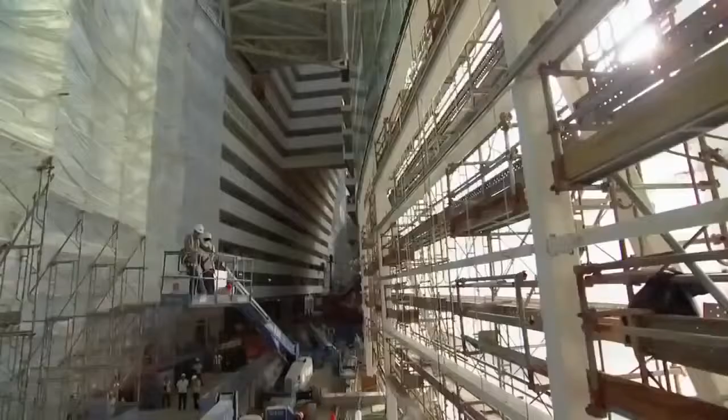Singapore is reinventing itself. This small island nation is attempting to finish one of the most audacious buildings on the planet: the country's first casino, 3 skyscrapers covering 9 million square feet, topped off by an engineering masterpiece, the first ever SkyPark, longer than 3 football fields, with gardens, swimming pools, and restaurants, all higher than the Seattle Space Needle.

We're actually in the pool right now. This is the view from the pool. Wow, it's pretty spectacular. That is amazing.

To finish it, crews must perform some of the highest and heaviest lifts ever attempted. You're putting a piece of steelwork the size of an aircraft carrier on top of 3 towers. They'll tackle one of the largest paint jobs on the planet - you would never do this in America - and erect one of the longest cantilevers in the world, 200 feet out over nothing. Oh my God, that's enormous.

I am in Singapore, a tiny island nation with less than 5 million residents. In fact, the entire country is smaller than all of New York City. Located at the southern tip of the Malay Peninsula in Southeast Asia, the main island of Singapore is both a city and a country, one of the most densely populated in the world.

Culturally speaking, it's a somewhat strict and buttoned-up environment. Chewing gum is against the law. Insensitive behavior is punishable by fine. And if you're caught vandalizing a building, you quite literally get hit with a stick.

But despite this conservative cultural backdrop, Singapore is attempting to reinvent its image by doing something totally surprising. They're going to open a massive casino. With no natural resources of its own, Singapore is risking $5.5 billion in hopes of cashing in on the gambling boom exploding across Asia.

It's a pretty significant gamble, because for Singapore you've never had gaming before at this scale. You've never had a resort at this scale. You're taking a kind of major leap. Yes, it's certainly a transformational project for Singapore, where you hope to not just double but triple the tourism receipts. That's big.

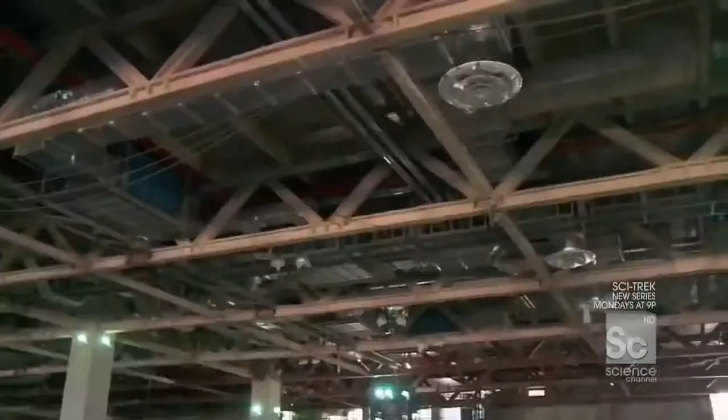The centerpiece of this giant transformation: the Marina Bay Sands, one of the biggest and most expensive casino complexes in the world, unlike any hotel and casino ever built. Rather than just being a traditional hotel and casino like we might find in Vegas, instead we have a museum, theaters, retail, a casino, a massive convention center, 3 incredible hotels, and all of that capped by the first ever SkyPark. The SkyPark on the very top will become the icon of Singapore, we think.

In a move that has never been done before, world-famous architect Moshe Safdie put a park across the top of 3 massive skyscrapers. An 1,100-foot-long urban oasis with tropical gardens and one of the longest swimming pools on Earth, all of it perched 55 stories above the ground.

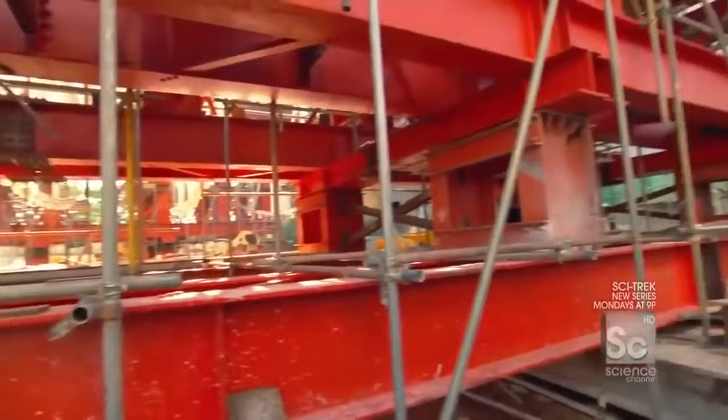So, Brendan, how do you describe a SkyPark to people? It's just a fantastic structure, I've never seen anything like it. There's 3 55-story towers, and you're putting a piece of steelwork the size of an aircraft carrier on top of it, so it's quite a feat. And there's a park up there? There is - well, there's more than that. There's observation decks and swimming pools and restaurants and all sorts of things. It'll be a little city in itself.

The biggest challenge for builders: lifting 7,000 tons of steel, which is more than the main span of the Brooklyn Bridge, on top of 3 650-foot-tall buildings.

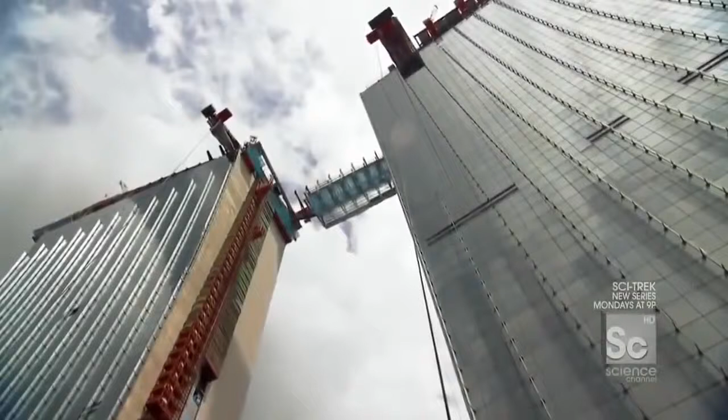To get it up there, the team divided the structure into 14 large but more manageable segments. 6 form the bridges connecting the towers, and the other 8 make up the observation deck, which sticks out 218 feet from the end. Right now, crews are about to lift the second-to-last bridge segment, a massive 350-ton piece that will hang between towers 2 and 3.

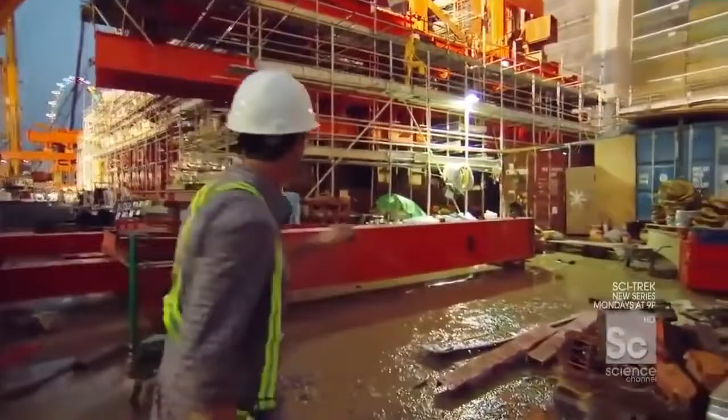It's a little after 7 p.m., and on most job sites it'd be quitting time - folks would be going home. But here in Singapore, we're about to begin one of the most critical lifts in the entire project. That bridge segment right there, an over 350-ton chunk of steel, is about to get lifted up over 650 feet in the air.

I mean, in principle, this sounds crazy, right? Yes, we're actually taking a bridge, lifting it up, and putting it on top of 2 skyscrapers. This has never been done. So you've got to be a little bit nervous to get this thing up. Oh, definitely. We have to get it right.

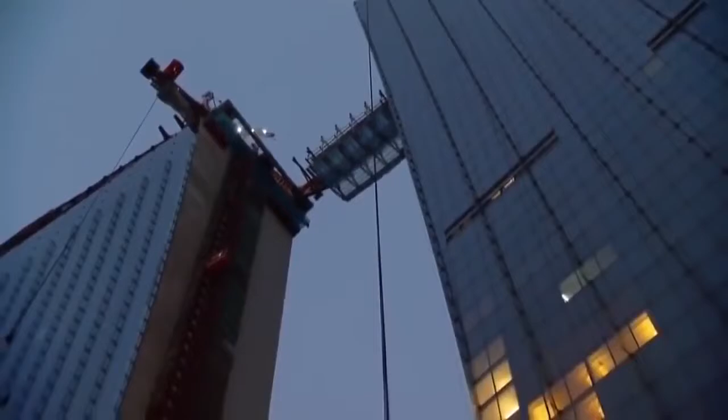Lifting this piece will take some of the strongest hoisting cables ever designed. They get attached to the very top of the segment, 5 stories up. Now I'm on top of the whole bridge segment, and you really get a sense of its length, because look at that. It spans all the way out between 2 full towers, over 150 feet long.

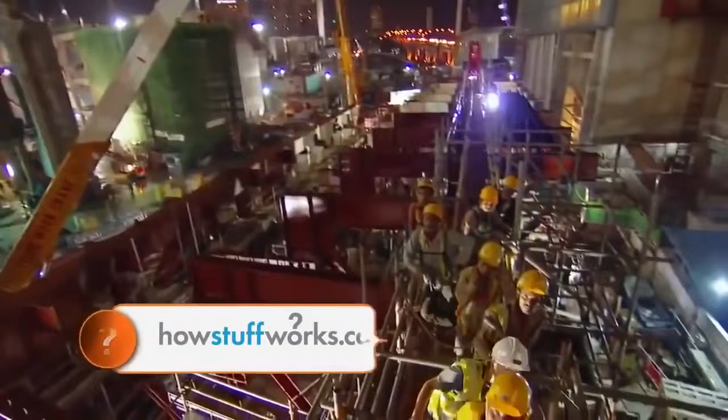And here, this is what it's all about. This is the shackle coming down, over 600 feet up. To really get that point, check this out. Look at the amount of bound cables inside of this thing, just the density. There are 2 of these shackles, one on this side, one on that side. We're going to lift up over 350 tons of steel.

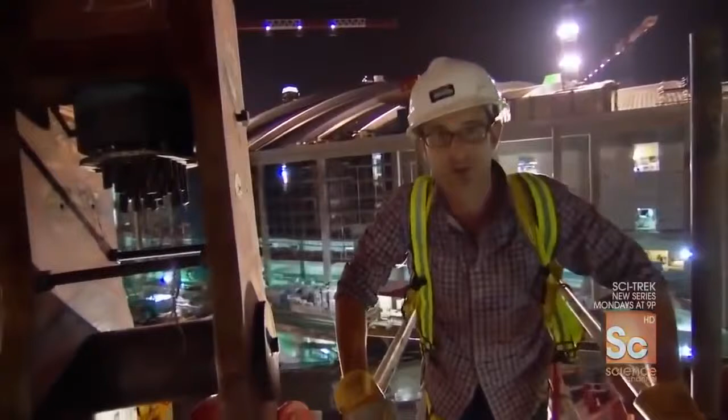All right, you call the man upstairs. An operator from the top of the SkyPark lowers the shackle down. There she comes, there it is, here it is. Okay, 960 millimeters. It has to line up within 1/10 of an inch for this 150-pound anchor pin to fit through. Oh no, stuck. Push, fight, come on, shake it a little bit.

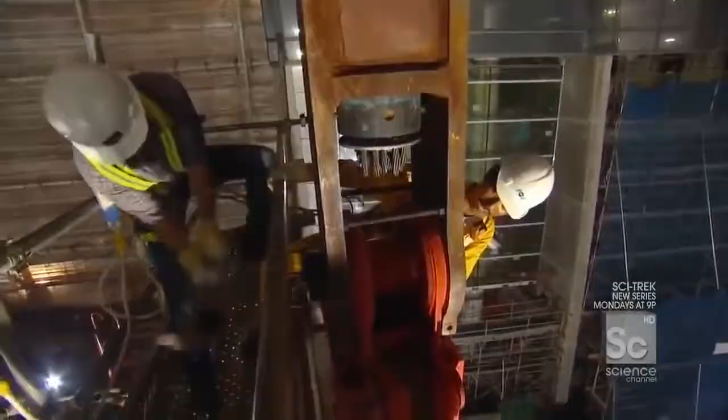Hammer, give it to me. You ready? Here I come. Once the pins are pounded into place and the shackles are connected, there is one final step to make sure that the load is secure. Overnight, crews test the connections for 12 hours by hanging this segment just 4 inches above the support. If everything looks good, it is ready to go up.

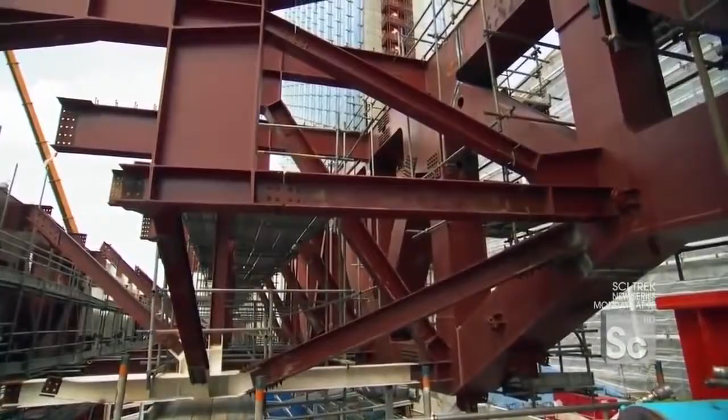Okay, she's floating, good, 4 inches off the ground. Ready for the lift? Yes. How's the wind? If you can see it, it is swinging, and if it swings, it might hit the building. So when the lift begins, the concern is that in a strong wind, like a pendulum, it could move and actually hit the building. It's that close to the building? It is very close to the building.

Because of the curvature of the towers, this piece must pass within 10 feet of 2 glass skyscrapers on its way up. Any wind over 5 miles per hour is enough to call off the lift. So are we good? Are we ready? Yeah, good. So it's now okay to go.

Typically, crews would use tower cranes for heavy lifts, but this segment far exceeds their capacity. Engineers are borrowing the technology from a different kind of construction: bridge building. Even the most powerful tower crane can lift about 20 tons. This thing weighs over 360 - not an option.

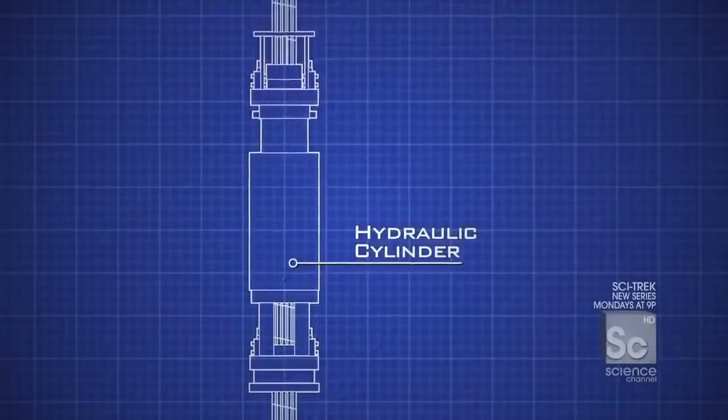So they went with something called a strand jack. To understand how it works, imagine 2 hands or clamps holding a rope. One hand locks the rope, the other brings the rope up, grabs it, goes back for more, brings up more rope, and so on. Strand jacks work on simple hydraulics: a bundle of 22 half-inch diameter cables passes through 2 clamps. The top clamp grips the strands and moves up almost 2 feet. Then the bottom clamp locks the cables in place while the top moves back down for the next pull-up.

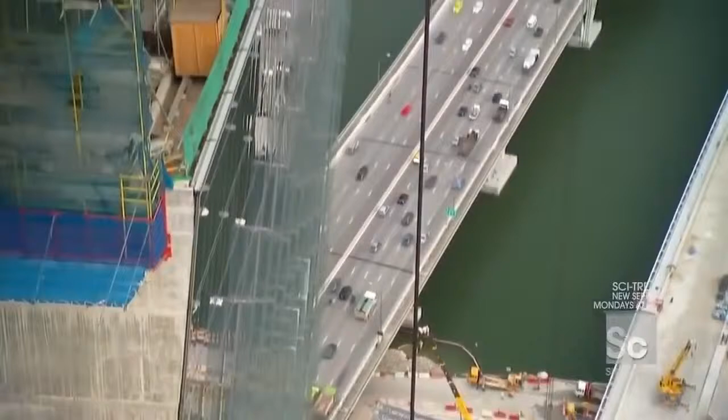It takes 2 enormous strand jacks to lift this segment, one on each tower. Combined, they could lift the Statue of Liberty. It's the first time this technology has been used to make lifts this heavy from the top of a skyscraper.

Good to meet you. Good to meet you. Tony, where am I standing right now?

Well, you're on the SkyPark. So this is kind of where the action is. This is where the pool is. Right where we are now is the second swimming pool. We're actually in the pool right now. This is the view from the pool. Oh my God, people will be able to swim out to the edge of the pool. And literally there'll be no edge, right? It'll be an infinity edge looking out over Singapore. Wow, it's pretty spectacular. That is amazing.

And what's making all of this happen is this really nasty looking beam. That's right - this enormous frame is supporting the strand jacking units. Now, can we actually head up top to the strand jack? Yeah, let's go this way. The strand jack sits on a temporary support structure that extends 30 feet out from the side of the tower. So, Tony, where we're walking right now, we're actually leaving the skyscraper below us and now heading out. We've just walked off the edge of the building.

So we're now standing perched out. There's no more skyscraper below us right now. There's no building below us.

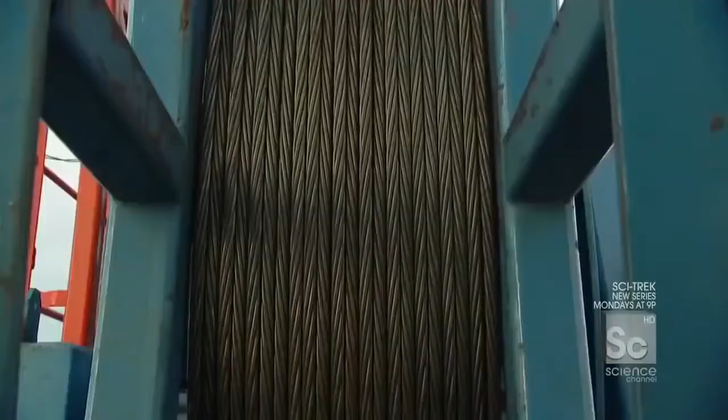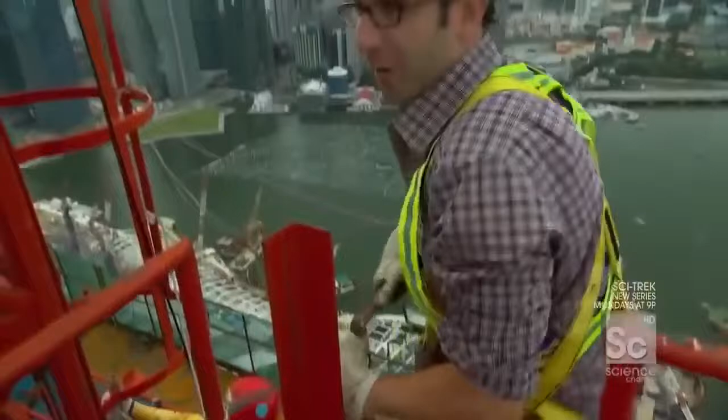It's awkward. It takes almost 30,000 feet of cables to raise the segment, enough to cross the width of Manhattan. And if any of them get tangled, workers cannot lower the piece back down. So one of the most critical jobs on the site falls to the cable manning crew here at the highest point of the SkyPark.

Okay, so I am now standing at the very top of the strand jack. And you know that because right here, this is it. This is the top of the cables. And what we're about to do, every 30 strokes, they stop everything, clamp the lift, and spray some lubricant inside to make sure everything moves real freely.

Unfortunately, I'm getting tasked with that role right now, so what do you got, some WD-40 we're doing this with? Look at this guy. Why is this the most low-tech thing in the world?

Okay, so now what we've done is we've taken the collar off, we've lowered the jack down, now we've exposed the cables to give us good access for some good greasing.

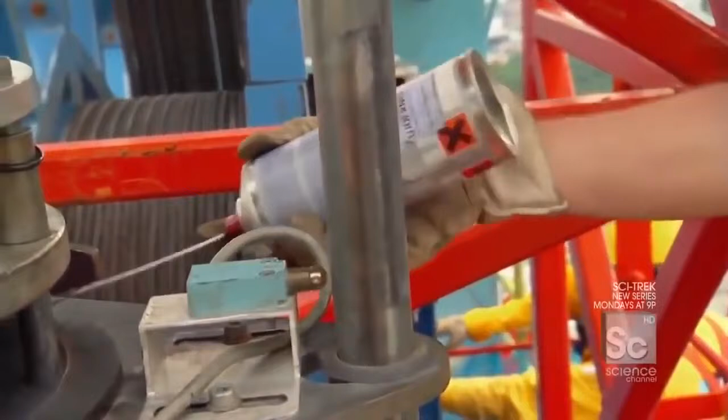Okay, Romley, how do you grease it up? Spray and pull out. Put in, spray, pull out. You know, it's sort of humbling to have to climb up to this point, to have that behind you, to have to take a spray can like this, stick in, spray, pull out.

These guys have to grease these cables once every hour for the entire night to get this segment up the final 500 feet to the very top of the SkyPark.

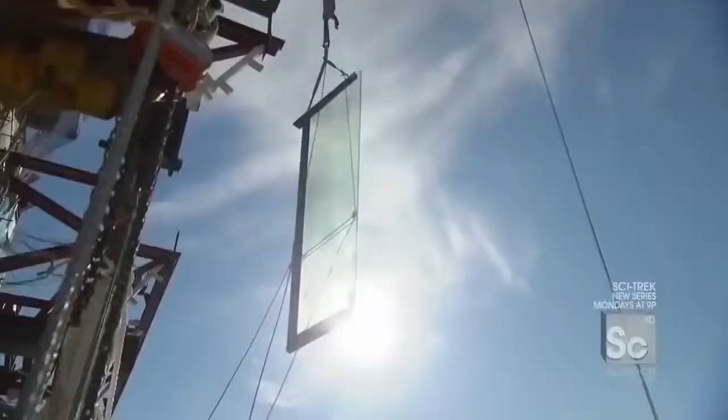Coming up: a one-of-a-kind solution to fight Singapore's intense sun puts up a fight of its own. Doug, can I pull you right outside of the basket?

Singapore is just 14 miles long. And with literally nowhere else to expand, this tiny island is increasing its footprint by actually filling in the sea, creating almost 1,000 acres of land on which to build an entirely new downtown.

So tell me something. If I was standing here 5 years ago, what would I have seen there? Well, 5 years ago, you wouldn't see the floating gallery, you wouldn't see the wheel, you wouldn't see Marina Bay Sands, neither would you see the financial center. So this is a radically different skyline in just 5 years' time.

Yes. Singapore's evolution involved 30 years of land reclamation, followed by 5 years of construction, all culminating with the Marina Bay Sands. So 5 years ago, this would have been called the old downtown of Singapore. Yeah. And now with the Marina Bay Sands completed, this becomes the new downtown. Yes, absolutely.

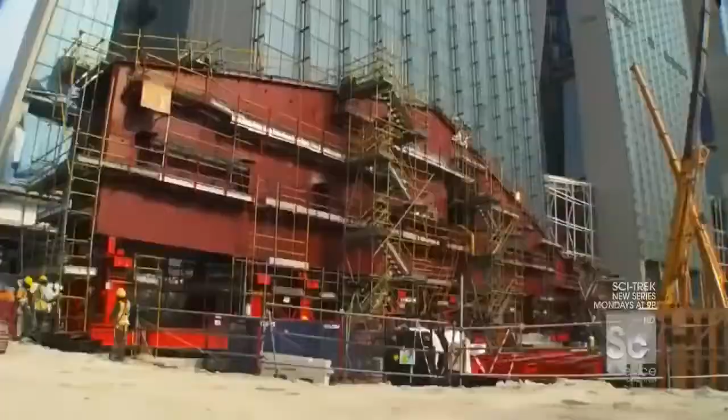The Marina Bay Sands' 3 hotel towers will offer guests phenomenal views of Singapore's new downtown. But they also had to be a stunning centerpiece for the city's redevelopment. So, to define their curved silhouette, the architect clad the tower facades with 1,900 glass fins, which also perform a key functional role for the building.

The western face of the towers gets the most intense afternoon sun. So when the light hits the fins, they actually deflect the sun's rays, casting a shadow that reduces the heat on the hotel rooms by 20%, while still enabling clear views of the bay. But this distinctive design feature is also one of the most difficult to install.

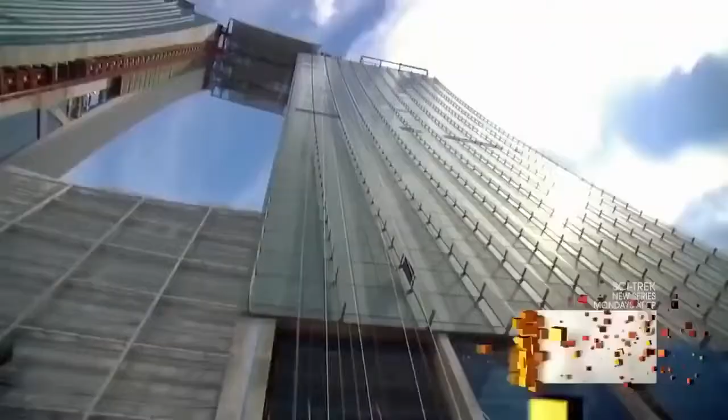I think today is going to be one of those days where I go and do something that I kind of think I shouldn't do, but in the name of really understanding how it is they build this building, we're going to do it anyway. I'm going to take you in a gondola up the side of a building, almost 600 feet, to install glass fins. And the guys who are going to help me do it are right here.

Terry? Hi, Danny. Good to see you. David, how are you? Danny, good. Not bad. What are we up to, fellas? We're actually going up to the top. Basically, we're going to install the last fins to the Tower 1.

And these fins are actually hanging perpendicular from the facade of the building. That's correct. Each fin is 10 feet tall and weighs 400 pounds. They're hung in straight vertical lines, protruding up to 4 feet from the side of the tower. Because the facade actually curves outward 5 degrees at the top, there would not be enough clearance for the SkyPark lift to pass by. So 12 fins in the upper corners of each tower were left off until now.

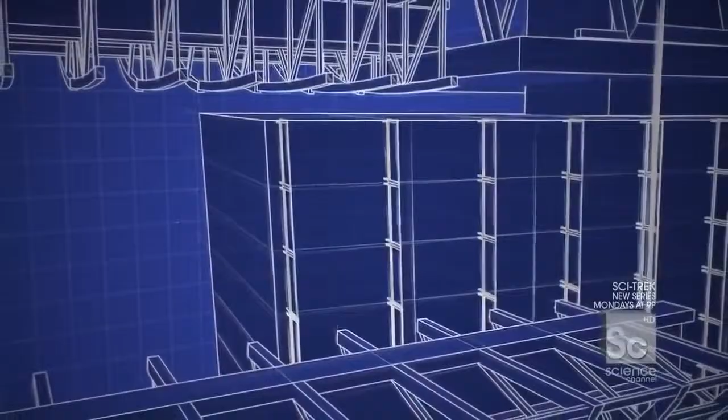So this is it. We are closing up the curtain wall of Tower 1. Yes. Big milestone. Big milestone. All right, take me over to my maker. Let's do this. Okay, no problem. Lead the way.

Terry's crew installed the fins from a 6-foot-long gondola hanging off the side of the building. You gotta be kidding me. It's basically the size of a bathtub, swinging from 2 sets of 650-foot-long cables tied to the tower.

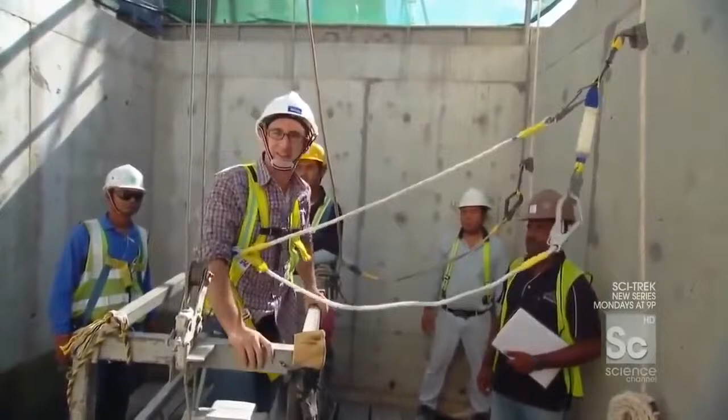Just gonna hang some glass for my boy Jay. 600 feet in the air. Right, man? Give me some skin. Buddy, we're gonna be great.

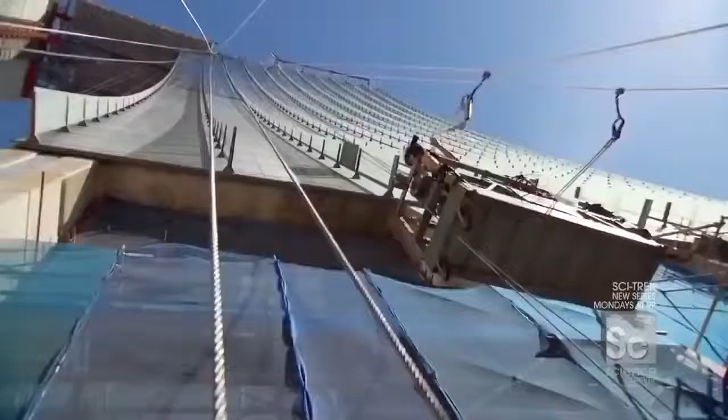Yeah, here we go. The gondola travels at just 0.2 miles per hour. Here I come, moving along, just moving along. So it'll take me more than a half hour to reach the top. Oh my God, this gondola looks like it was built by the Unabomber.

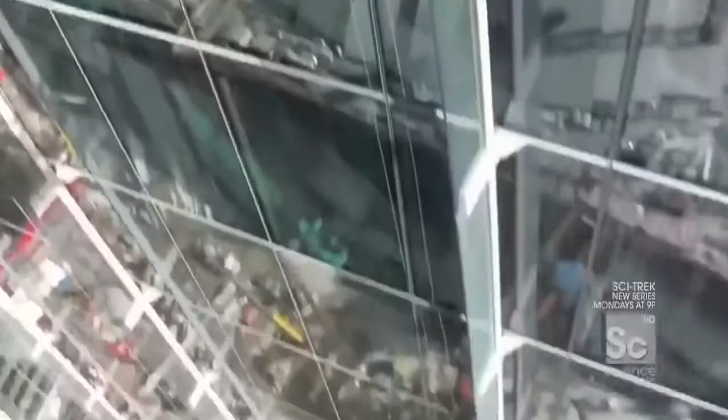Sometimes I don't really feel like I give you exactly what's going on for me right now, so I want to give you just a little taste of what I'm seeing. There is a fantastic view of Singapore. There is Jay, my chatty friend. And there is not a good situation.

All right, we're almost near the top, and you can tell because the building is beginning to bend back on itself and get closer to me. Right there, check it out, we're about 80 feet from the top of the building, and you can see, if you look up, the missing glass panel.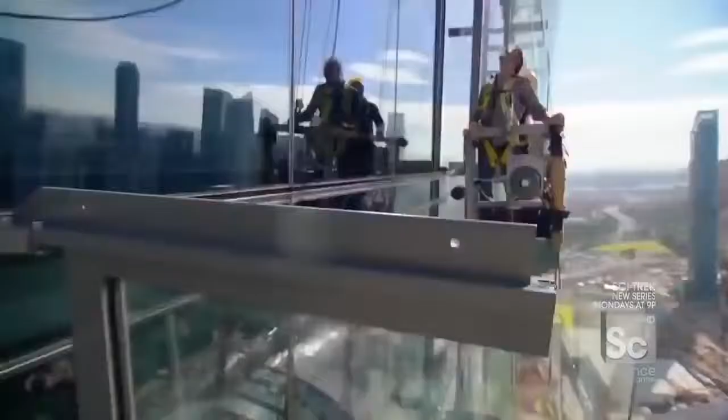And as I approach the top of the skyscraper, they're prepping the glass. There she is. Oh, the wind is really moving up here. That looks safe. Hey, fellas! How are you? Nice weather, huh? Okay, this is something you don't see every day.

I'm outside a skyscraper, and right here, right now, I am touching the top of the building. We are on top of the skyscraper. All right, who's ready to install some fins? Each fin is a custom-built pane of solid glass.

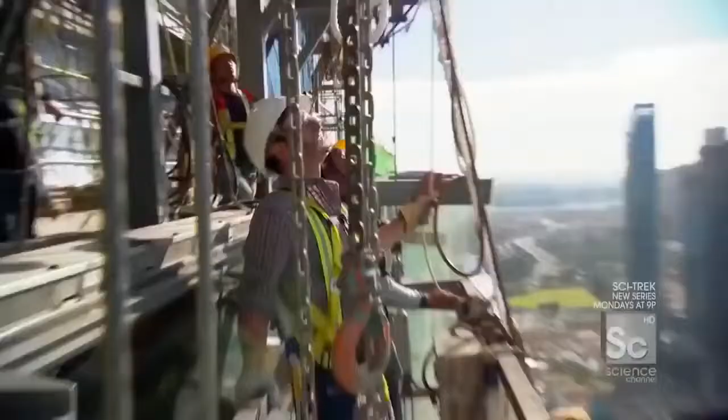I got the line, hang on. On a calm day, these are extremely difficult to manage. The wind is blowing this thing out. Give me a hand, give me a hand. But on a day with even a light wind, the task is almost impossible.

Hang on, these gusts are gonna pull you right outside of the basket. Hang on, give me some help. But I'm not kidding, every time you get like a little gust of wind, I can feel my feet getting pulled a little bit. There she is, slowing down. It's basically like a big double laminated glass sail. And if the wind catches it, it moves.

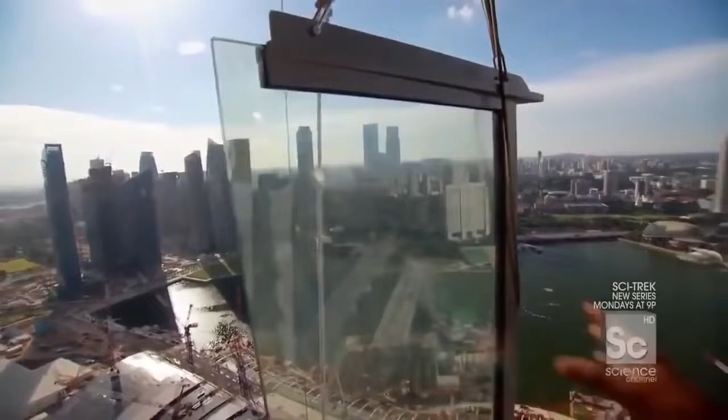Okay, let it come down a little bit more. The fin can swing up to 20 feet while attached to the tower crane. Coming this way. Okay, watch out. Someone help him, someone help him. That's just too dangerous for the final installation.

So the team has to transfer it to a more precise chain block mid-air. Whoa, hold that side, please. All right, so this is it. What we're doing right now is essentially taking the load from the crane and transferring it to that chain block. Are we in? Okay, I think we're set.

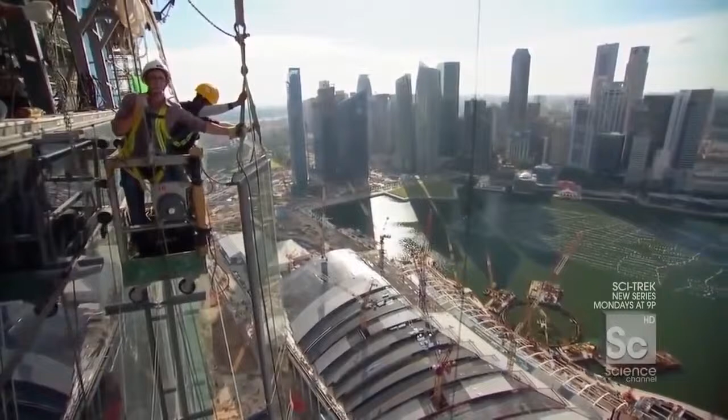This is another one of these moments in my life where I say to myself as an architect, did you really need the fins? Did you have to have fins? The building would have been fine, you know?

Okay, gondola down. The fins are designed to clip into each other at the bottom. Lean down now, Jay. But here, at the very top connection on the highest fin, oh boy, this is gonna be a nasty one, it gets locked to the building with bolts. Okay, Jay, 4 bolts.

Give me your bolts, 1, 2, 3, 4. Are we good? Okay, are we good? Come here, bring it in, I need some, come on, give me it, babe, I need some. There it is, okay, that's right. 4 bolts, locked in, lined up. We, Jay, are done. Can we go home?

Home, that much he understands. Let's get out of here.

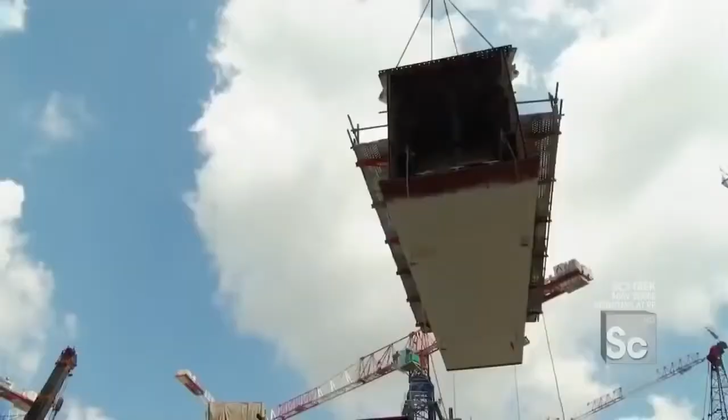Up next, building one of the longest and highest cantilevers in the world, jutting out more than 200 feet over nothing. Oh my God, that's enormous.

Singapore's new SkyPark is the first of its kind: a steel structure longer than an aircraft carrier, on top of 3 skyscrapers taller than the Seattle Space Needle. On the northern end, the architect took this innovation one step further, creating the longest cantilevered observation deck in the world. It's the biggest and heaviest section of the SkyPark, and it hangs out 200 feet over thin air.

When it's done, the SkyPark will look like one 1,100-foot-long continuous element, but it's actually made up of two very different structural conditions: bridges on one hand, and a cantilever on the other. Spanning between towers 1 and 2, and towers 2 and 3, are two bridges, acting like tabletops. The force goes from the bridge into the towers, and down shear walls into the foundation.

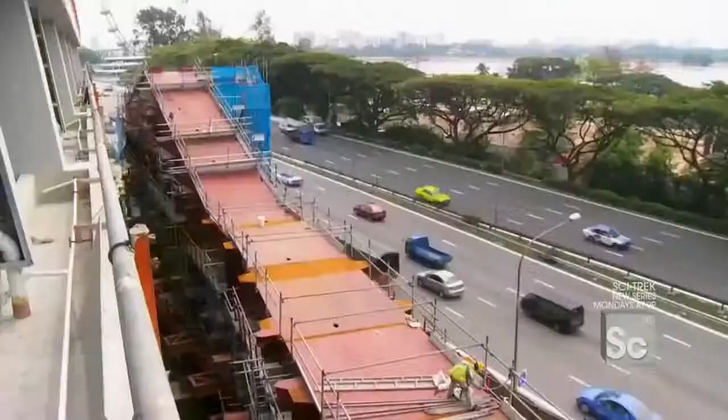The cantilever is a different story. By definition, a cantilever is a load supported on only one side. So you have a 218-foot-long span, almost like a diving board, perched out over nothing. Intuitively, that load wants to twist off the building. So to hold it down, they've put two 700-ton backspans holding down the cantilever. The two backspans weigh as much as a fully loaded freight train, but that weight is critical to balancing the cantilever, which will jut out longer than a 747 from the end of Tower 3.

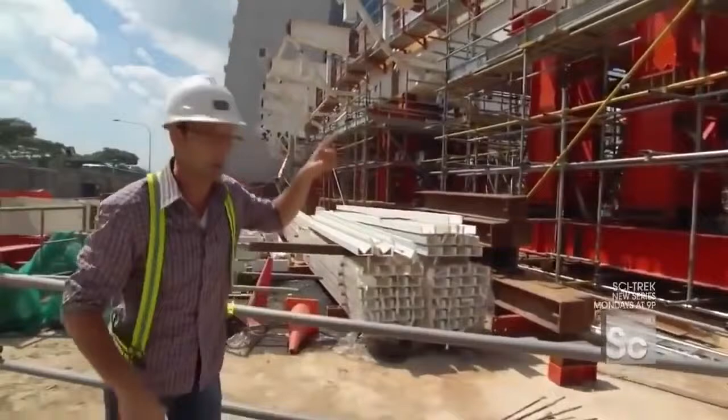There are 860 tons of structural steel that make up the 218-foot-long cantilever. It's so big that they assemble the entire unit on the ground before sending it up. The cantilever is too big to be raised in one lift, so it's divided into 6 segments. Once they're 650 feet in the air, crews will have just one shot to fit them together. So before the segments can be lifted, they're assembled on the ground to be sure each connection will fit perfectly.

These pieces represent the very final pieces of the cantilever to be assembled here on the ground. Once we get this piece and this piece bolted onto that massive cantilever, the lifts can begin.

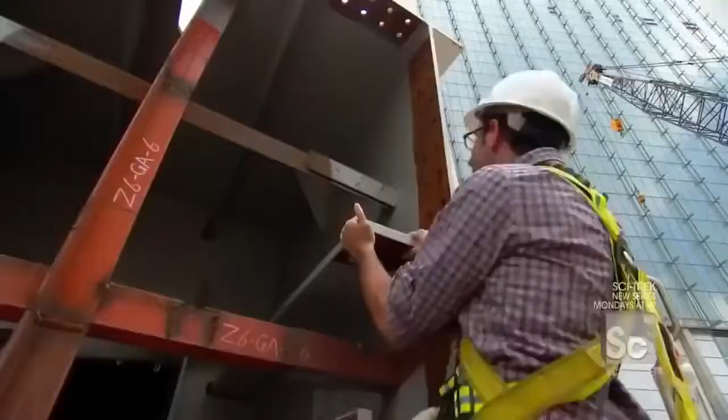The crane's now setting the shackles up. We're going to go on top of the piece to connect it. The piece we're attaching today is 12 feet tall and weighs 30 tons, as much as 2 Mack trucks.

The crane will lift it over to the rest of the cantilever using 4 extra-large shackles. Shackle number 1, 2, 3, and 4 are all connected. The next step is to take the piece I'm standing on, lift it up, and extend that cantilever another 50 feet.

You ready? Knuckles! All right. You ready, Knuckle Man? Knuckle Monster, you got it. Nux Magoo, come over here for that. Bang! We are ready to go.

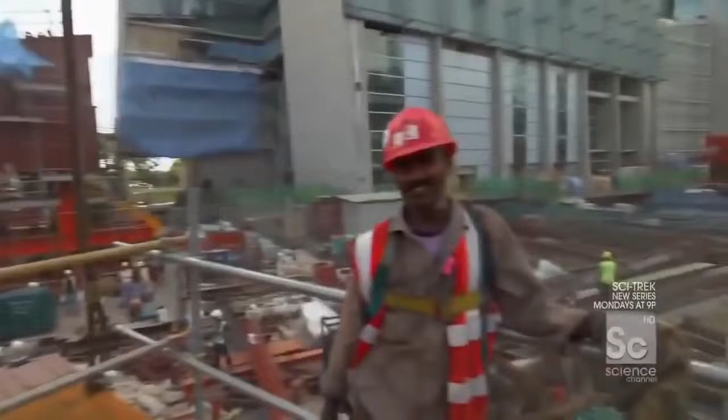They've put a bit of tension in the line, lifting the piece just off the ground to make sure the shackles look right and they know where the center of gravity is. Are we good? Are we ready? Yeah, all right, let's go. She's off, out of our hands. Now the crane's got her. He's going to swing her all the way around this way.

What's really worth noting is, as you look at this massive floating piece of steel, it's not but a small fraction of the entire cantilever that's going up there.

Even with 1.5 million pounds of steel, this cantilever will still be susceptible to the problem facing all structures: movement. All buildings, bridges, even cantilevers have a natural frequency, meaning they move ever so slightly. If the movement of wind, or even of people, starts to align with that building's movement, it can combine and literally shake a building. So when the engineers were designing the cantilever, they had to be concerned not just with how many people stood on the edge, but also how they were moving.

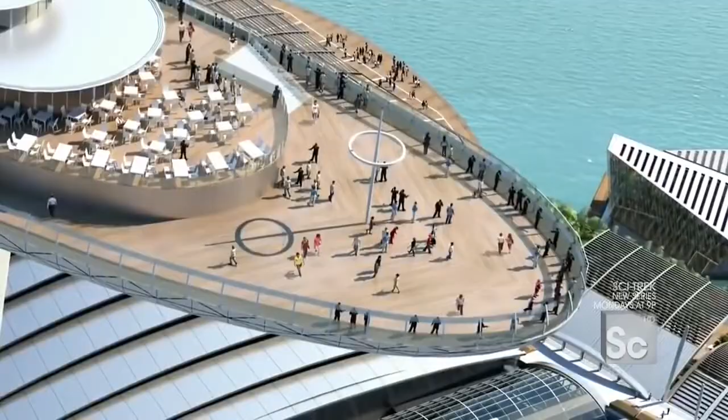This cantilever has been designed to withstand wind and earthquakes, but its most dangerous threat could come at the hands of a DJ. It's thousands of tons of structure up there, so you and me jumping about isn't going to do very much.

But if you get 100, 200 people all jumping up and down at the same frequency, it can actually excite the cantilever and you start to feel it. It would take hundreds of people dancing to the exact same motion, like the Macarena.

Believe it or not, our dynamics engineers have iPods with thousands of songs that have the frequencies of all of these songs. So once we find out what the frequency is, in theory you can say you can dance the Macarena, but you can't dance the bus stop or whatever else. That can't be true, is that true?

So you're telling me some engineer is doing intense load calculations and figuring out that this thing can take the electric slide but it cannot take the achy breaky heart. And they know that in advance, it's been designed. More or less, yeah. Imagine the party, if it's going great, a big wedding, and suddenly someone puts on the Macarena and it's like, no!

Now that the piece has made its way over to the rest of the cantilever, the next major challenge is lining this giant segment up for attachment. The piece is now literally sitting right on top of my head. Just imagine, on top of this incredible long piece of steel will soon be a garden, a pool, and a dance party.

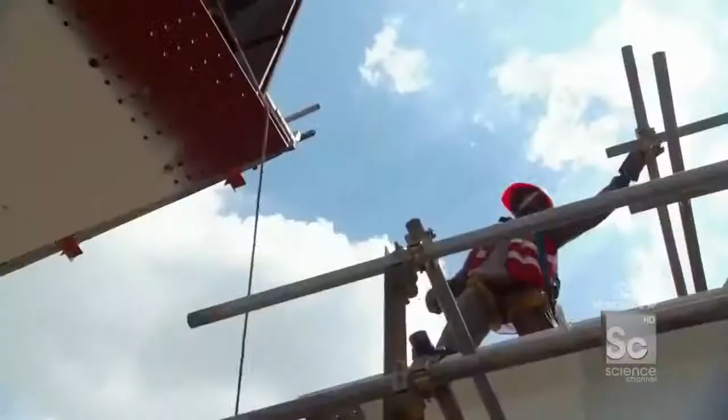Slowly got it down. Something incredible about lifts like these is that the first 99% happens almost instantly, and now it gets down to the details—pushing it, pulling it a matter of inches, to get all these holes lined up, to get the bolts in, and take the load off the crane.

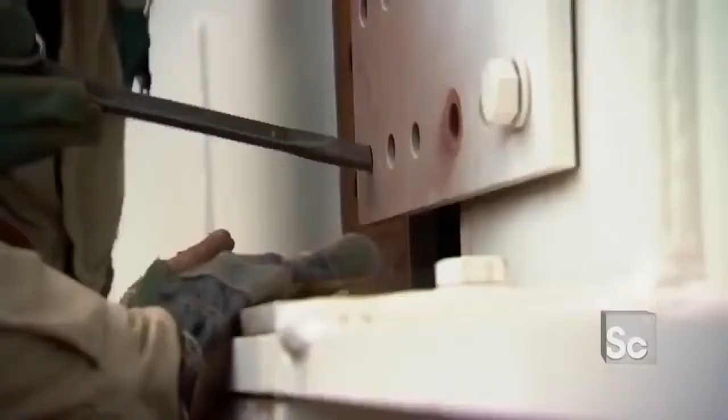So this is how one fits into the next piece right here. You have these two plates on top, and they're sliding over the top of the previous cantilever piece. Here it is, it's coming in, it's coming in. Once she's there, we'll put this pin in to lock the piece together so we can release the crane and move on.

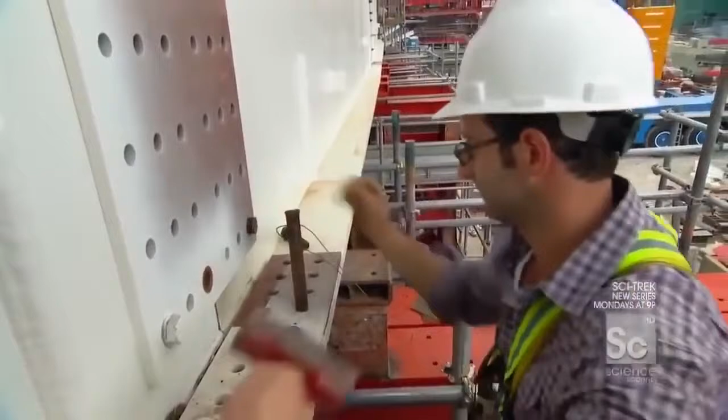Man, I never do that. Usually I break a finger and knock some steel off the thing and almost break the hammer most of the time. I knocked the crap out of that thing.

Well, as you can see, the piece is in its final location. And now from where I'm standing, I think you can really get what this thing is: an 860-ton, 218-foot-long steel diving board that's going to be perched out over 600 feet in the air.

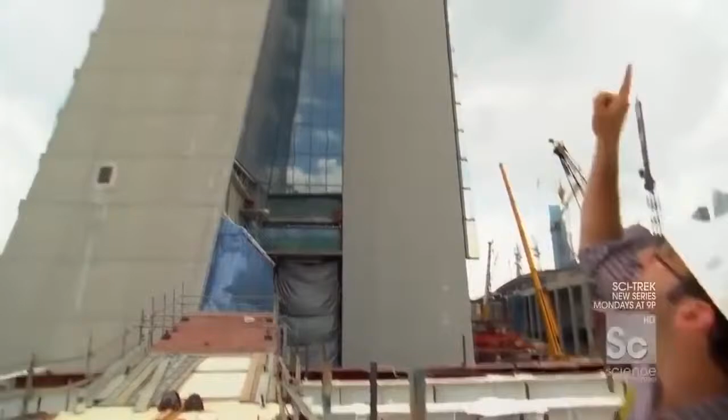And coming up, a hotel like no other, with a lobby bigger than a cruise ship wrapped in glass. This is probably one of the most spectacular corridors I've ever seen. But first, what is the maximum number of people the SkyPark can safely hold at one time? The answer after the break.

The answer to the trivia question: 3,900 people can safely be on top of the SkyPark, but only 900 of them can be on the cantilever.

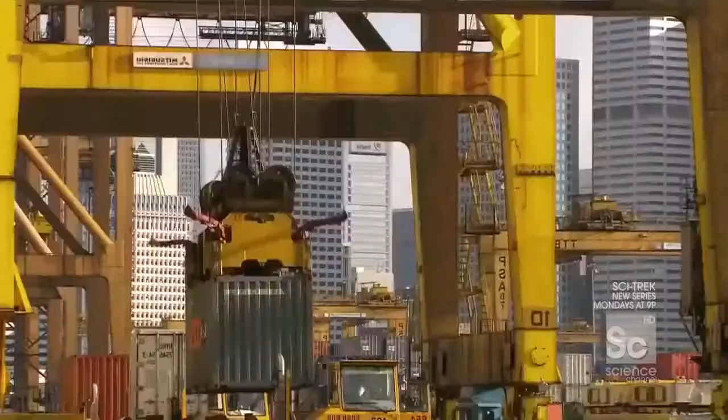Singapore is the gateway to Southeast Asia, and for the past century its economy has depended on its location as one of the world's busiest shipping ports. But this city is in the midst of a makeover. When the Marina Bay Sands opens later this year, Singapore will instantly become one of the largest gaming markets in the world, putting it in the same league as Las Vegas, Atlantic City, and Macau.

When Macau opened their casinos, they looked to the past for inspiration—you have the Venetian in Las Vegas, you have the Venetian in Macau, a carbon copy, only bigger. But here in Singapore, a country so focused on image, they didn't want to mimic what came before them. Instead, they're trying to literally reinvent the idea of a hotel casino.

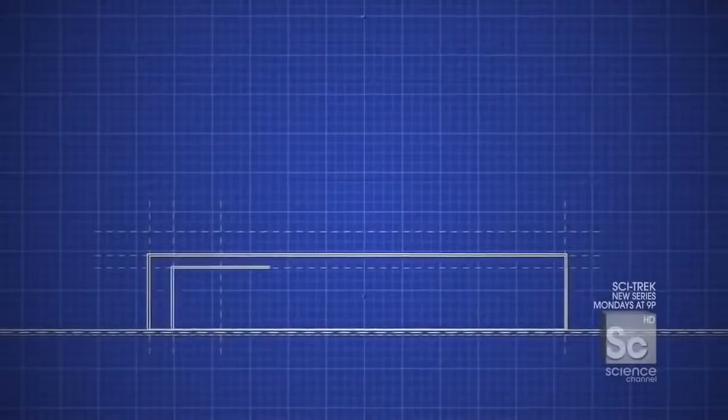The difference comes down to design. The typical casino model involves a giant gaming floor with a flashy attraction out front and a hotel connected in the back. But with the Marina Bay Sands, the architect actually separated the hotel from the casino and relocated the attraction on top in the form of a SkyPark.

From my perspective, when I think about a hotel and a casino, I think of a ginormous casino, a tall hotel in the back, and basically not being able to check in and go to my room without passing a blackjack table or a slot machine. This doesn't follow that model. It does not. Singapore has a very particular vision as to how they want the gaming component to work. What we built here was not something that was casino focused, it was all of this. So the casino is part of something far grander. Key to making that happen is not just building a set of normal, typical expected structures, but instead to do something like that. Correct.

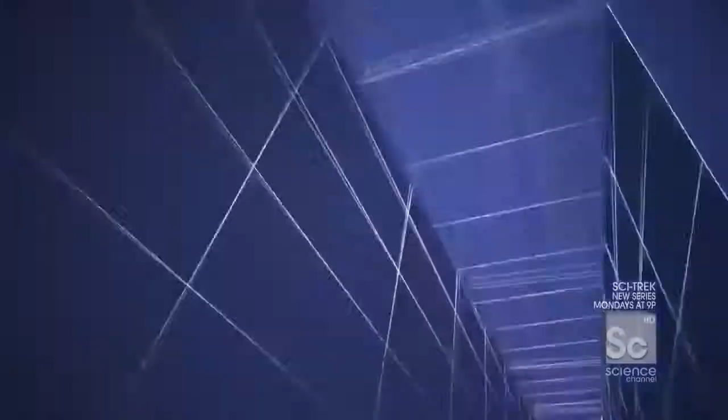This revolutionary design carries over to the hotel towers themselves. To create a hotel lobby like nothing before, the architect actually split each building apart for the bottom floors, creating one long tapered space linking the three separate towers together. The 3 hotel towers are all connected by one long continuous atrium.

And that atrium is covered in glass. These are massive 9-foot-long panels that we're about to take from down here and install right up there. 3,500 individual panels will hang throughout the atrium, transforming this space into one 850-foot-long tube of daylight.

So Terry, once the scaffolding comes down behind that glass, this whole chamber is going to be just awash in light. Yes, that's correct. And these spaces literally link all 3 hotel towers and let you look from one end of the building all the way down to the far end. That's correct. So this is more than just a kind of connective hallway from one hotel to the next. It's not just a corridor. This is not a corridor. No, and if it is, it's probably one of the most spectacular corridors I've ever seen.

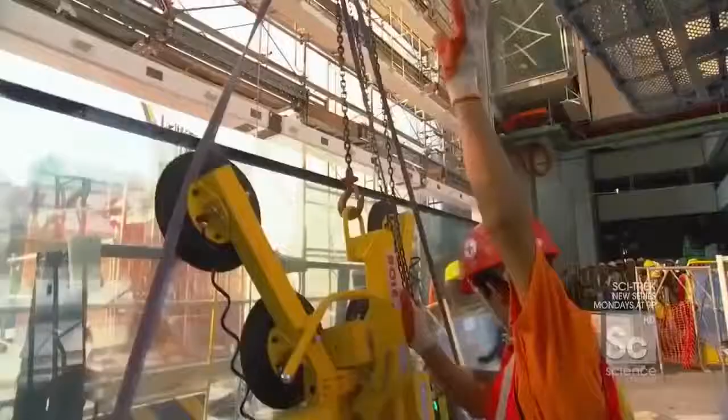Correct. The atrium glass is a key part of the tower design, but it also plays an important functional role in sealing up the building. With hotel guests arriving in just 6 months, the delicate job of hanging all that glass needs to happen quickly. Now, why is it so important to get the glass on the atrium and button up the facade? The vital bit is we actually have to make the building watertight as quickly as possible to enable all the final finishes to commence on the inside. So all the sheetrocking, carpeting, wallpaper, painting, that sort of stuff can't happen if moisture can still penetrate the building.

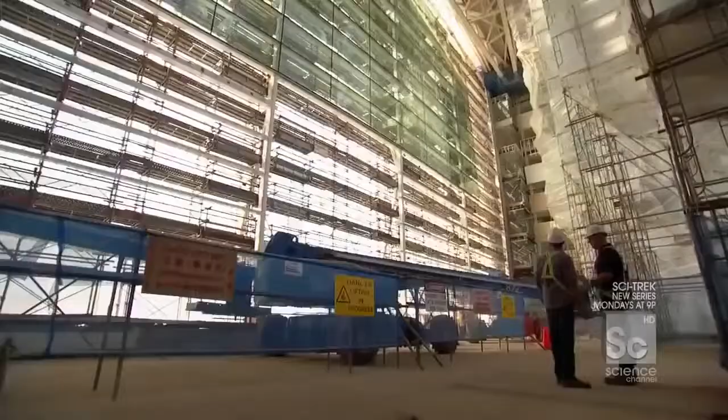That's correct, yes. So today we're going to be headed, where, up there? We're going up to the top and we'll be installing the top piece of the glass. So we have a big task ahead of us, either way. To finish the atrium on schedule, Terry's team has to install 200 panels a day, about 5 every half hour. So here the guys are, they're just getting the glass ready. A task requiring 8 international teams of glazing specialists.

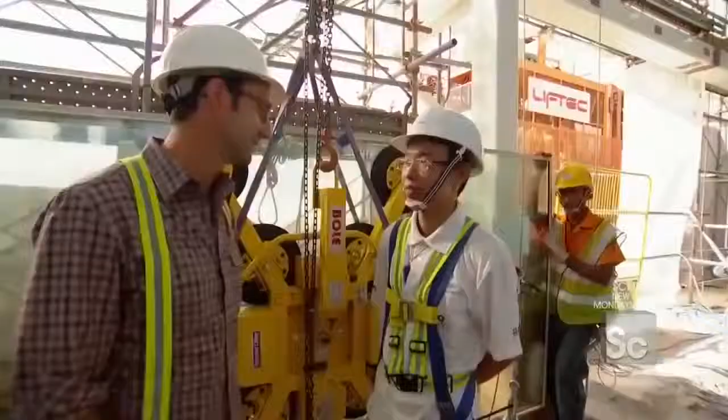Let's do it. We're installing the 3rd highest panel in this section of the atrium, more than 100 feet from the ground. Safety harness? Why? I want you to be safe the whole time.

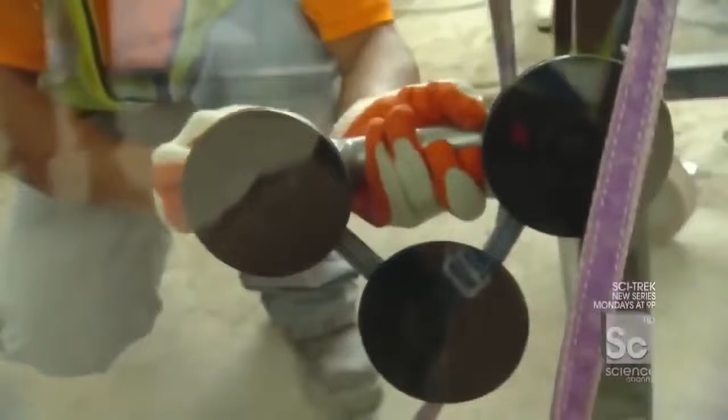In addition to Why and me, it'll take 10 other workers to install this 550-pound panel. The crew on the ground applies suction cups to the glass and then sends it up on electric hoists to meet the crew in the air. Here it comes, check it out.

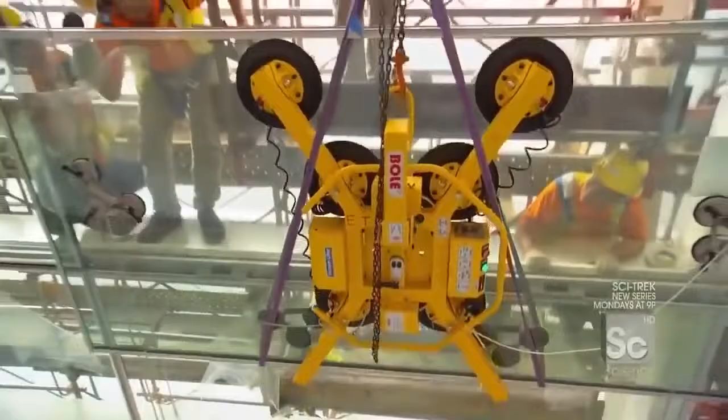And waiting for me. Hello, my brothers! You guys ready to rock and roll with myself and Why? Ready? The big team, this is it. This is the Singapore Glass Stallions. All right, here it comes. It's a big piece of glass, huh? Why? Yes. What are we doing, what's the first step? The first step is we need to take off the handle. Yeah, so I'll take off that side, you take off that side? Yeah, take off only the handle. Turn only. Yeah, yes. All right, I don't want to drop it though.

Don't want to drop it.

The panel is supported by a backup system of smaller suction cups to help guide the piece on its way.

It's okay. Let go? No, it's too scary, I'm not going to do it.

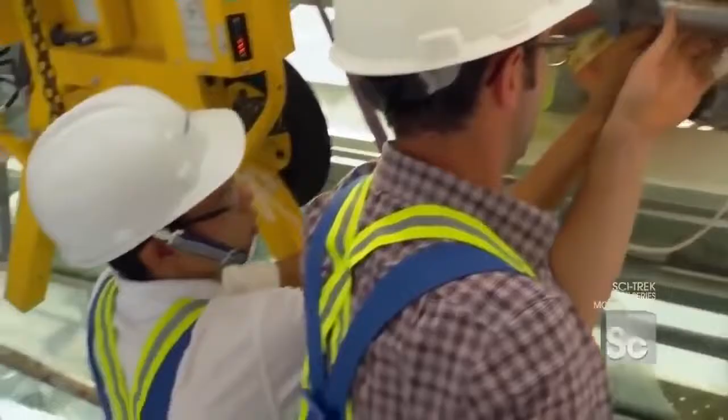Okay, I did it. And just like the glass fins outside of the towers, we'll finish maneuvering this panel into place with the chain block.

So the chain block has lifted the glass panel to just about the height of the previous panel. So the next step is to push it in and get it locked into place on the brackets.

Okay, why? Should we bring her in?

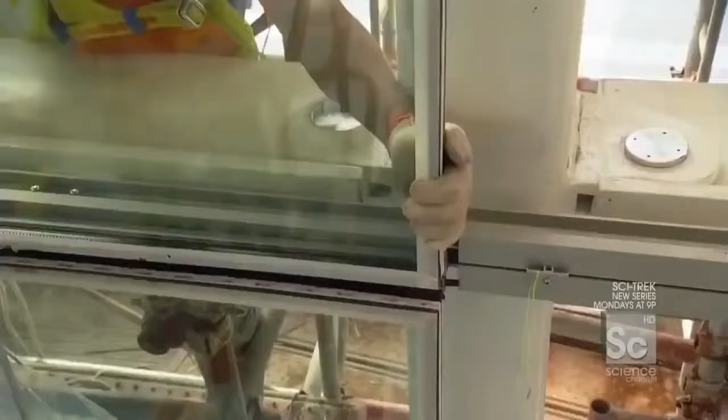The interior work for the hotel cannot get started until all the atrium glass is hung and the lobby is watertight.

So to speed up that process, 20 attachment brackets come pre-installed on the atrium wall frame. They sit horizontally so the glass can slide into place, and then we'll turn them vertically to lock the panel to the building.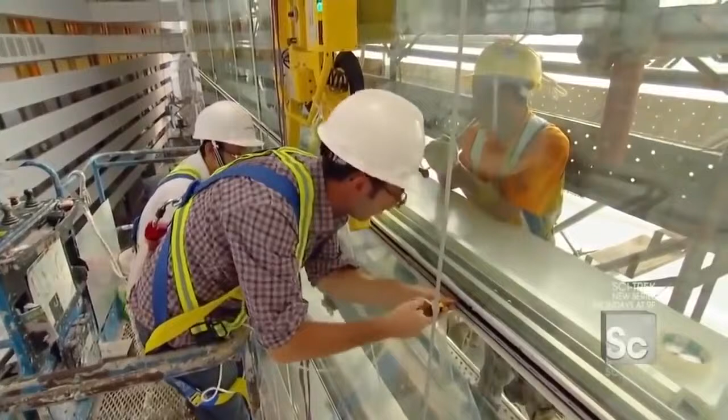Do I need the screwdriver? No, you use the power tools. I'm old school. You make sure all the pressure bars are tight because the hand power is not standard. Check it if you don't trust me. You have a look, that's just good stuff.

All right, so all 4 sides are locked into place, and this glass panel is now fully supported by the building.

So therefore, I'm pulling the plug. Suction is coming off. 3, 2, 1.

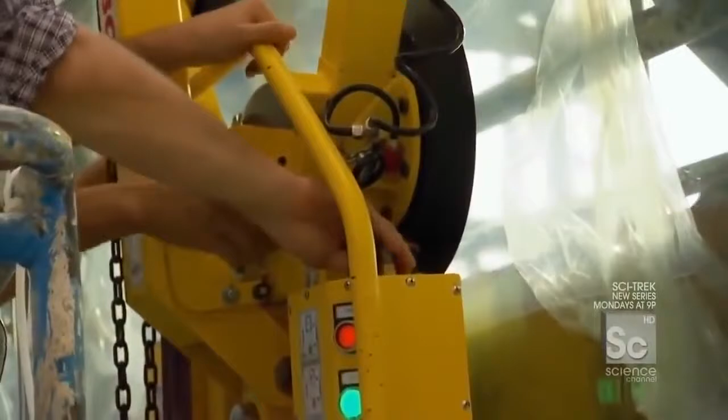Okay. All right. Very nice. Yeah. Look at that. Nice, huh? Very nice.

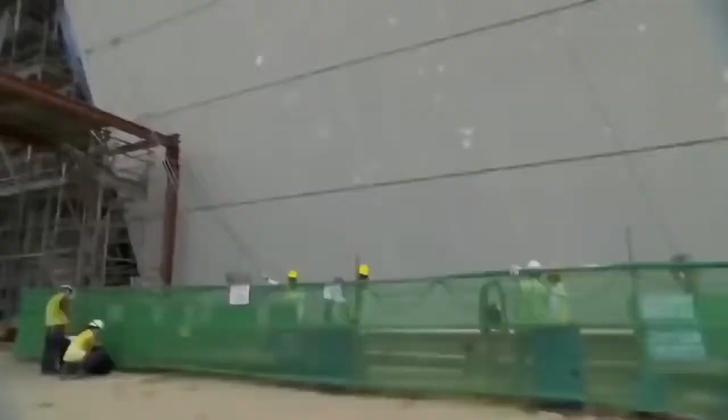Up next, racing to finish one of the largest paint jobs in the world.

We're gonna use a brush. Yeah, brush. This brush.

After 30 years, Singapore's ambitious downtown redevelopment is nearly complete. Its crown jewel, the $5.5 billion Marina Bay Sands, is due to open in just 6 months. And crews are racing to complete the hotel's complex facade.

The glass on the face of the towers is complete, but on the side walls, the concrete remains exposed. So to finish those walls on time, there's another massive job ahead.

When you clad the outside of a skyscraper, typically you cover it in maybe some stone veneer, maybe some glass, or maybe some metal paneling. What you don't do is paint it, because if you've ever painted a fence, every couple of years you have to repaint it. But here in Singapore, they're so focused on things being clean, so focused on immaculate maintenance, they're willing to actually paint their buildings. So today, I'm going to do something you would never see on an American construction site. I'm going to paint a skyscraper.

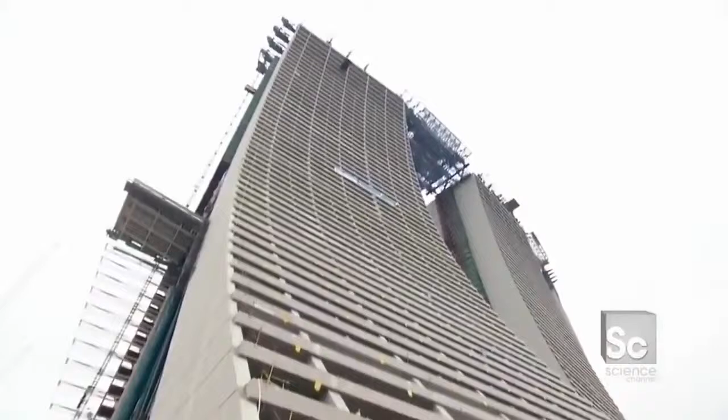Crews will have to paint an area about the size of Mount Rushmore. Muti, I'm Danny. This is going to be one of the single largest paint jobs ever attempted.

So I got a bucket of paint, and in order to apply the sophisticated skim coat with the technology, we're going to use a paintbrush. Really, Muti? Yeah, this brush. It's a small brush, yeah? Yeah, one small brush.

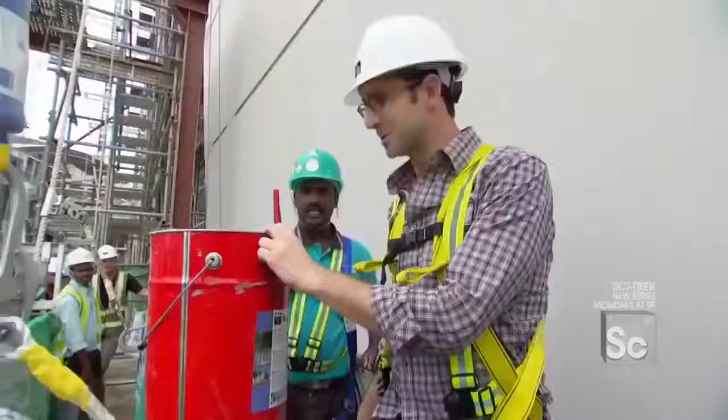Right, and obviously you couldn't do a skyscraper with that little brush, that'd be crazy. So instead, I have a roller, which ought to really expedite the process. Painting fast. All right, well, what more do you need? Muti, away we go.

This wall faces the country's main highway, connecting the airport to downtown.

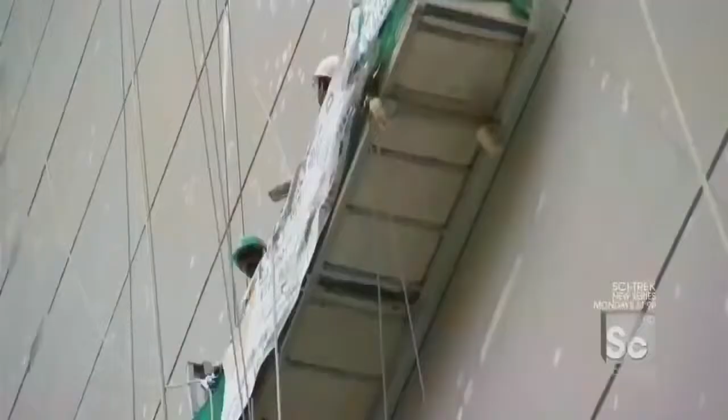So Muti, you're okay? Heights, no problem? No problem, no problem.

And on opening day, with all eyes on Singapore, it's gotta look good. Welcome to House Painting 101, Skyscraper Edition. So we're about 200 or so feet in the air.

We've reached our cruising altitude in a super robust and technologically sophisticated gondola system. And what we have to do is fix this wall, which is a mess, right? Little holes they patched and filled. We have to have one smooth surface ready to be seen by all of Singapore.

Muti, start with the dark gray first. Okay, I'm gonna paint within the lines here. The dark gray lines mark each floor of the tower, so you can still see the floor-to-floor separation from afar, giving a sense of scale to this massive surface.

Now that the gray line has been deepened and darkened, we're gonna start painting the building. So Muti, just go to it, huh? All right.

Nice and gray. I like that. Muti's looking over like I'm touching at the top of the Sistine Chapel or something. In total, Muti and the rest of the crew will use more than 2,200 gallons of paint.

Muti, how's it look? Does it look good? Yeah, very nice, very nice. Good. Muti's loving it. To cover all the tower shear walls in time for opening day.

And this project cannot afford delays, because every month the casino is not open, developers give up $100 million in lost revenue. So these crews have been running at top speed since day one.

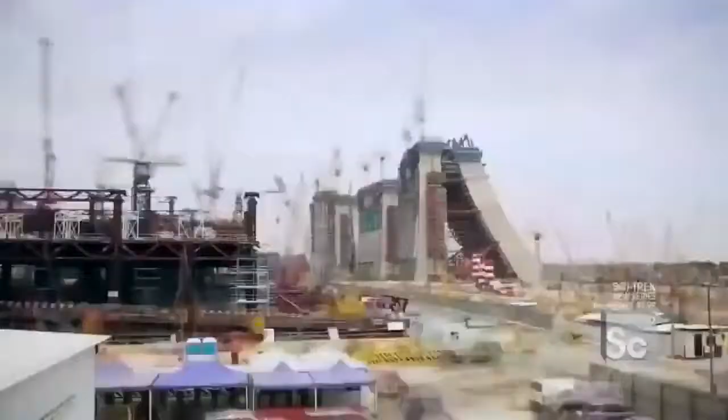So John, just to put this in perspective for someone who's not used to seeing a project this size, it would take perhaps another country, a project this big, this expensive, this complex, as much as 6+ years to build. Yep. And you guys are on target to complete this in 3 years.

Half the time. Yeah. And one of the critical aspects of this project at the moment is getting that SkyPark structure up. So getting the superstructure of that SkyPark done is key to kind of closing up this project and finishing this race.

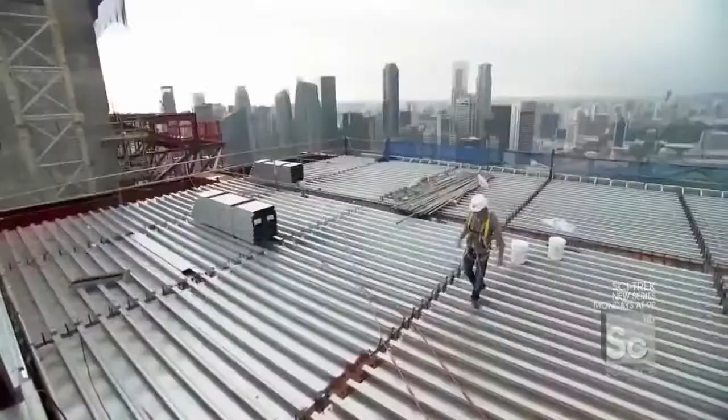But this is going to be a sprint to the finish, because crews up at the top of the SkyPark have only 6 months left to turn this mess of steel into the world's longest elevated pool deck. This is it. This will be the pool deck, and that will be the pool.

But there's a problem. I mean, there's a pretty big problem. You go on vacation, you come to the SkyPark, you see this amazing view of Singapore, and then you fall through a hole to your death. Not good fun on the vacation.

So Wilson and I are going to cover it with this aluminum decking. Cover the holes? Let's cover the holes, my friend. We're filling in the bridge segments between towers 1 and 2, more than 650 feet up. And there is literally nothing below us but the decking we're about to lay.

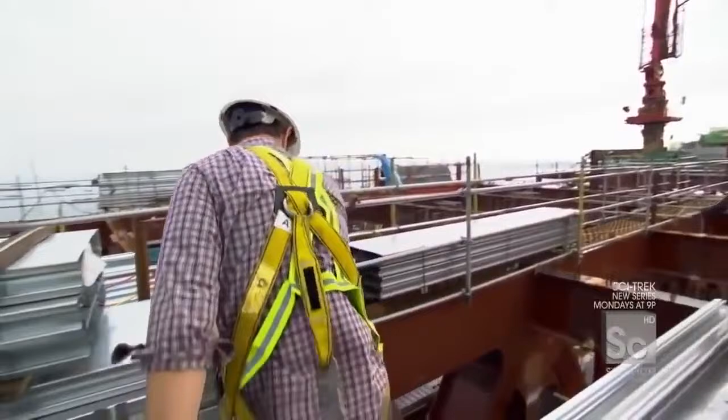Oh, I just got that. I just looked down and I saw a car and it was so little. And my body was like, wait a minute, what are you doing up there?

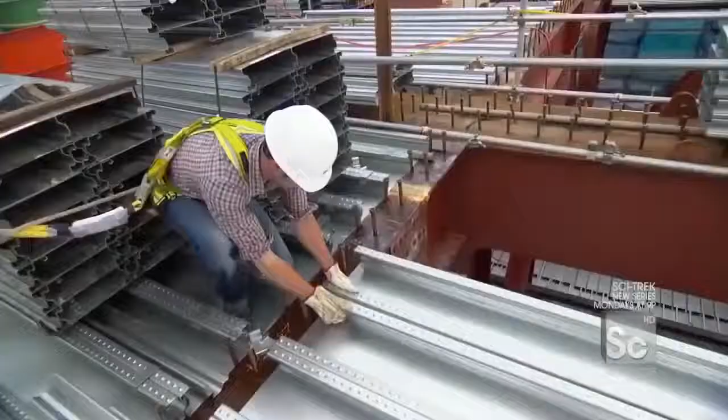All right, Wilson, how do we begin? Step 1? Yeah, step 1. Okay, you ready? 1, 2, 3. Okay, stroke in. Pull back, pull back. Okay, good. Put the clip on. Nice, Wilson, next piece, plugging up the hole. Dear God. Okay, letting go.

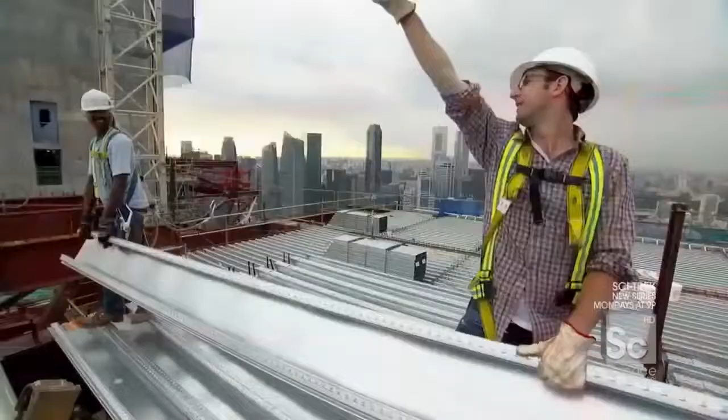With these 10 panels in place, another 125 square foot section of this SkyPark deck is complete. Last piece, huh? Wilson and the rest of the crew will have to lay down 300 panels a day in order to have the entire SkyPark ready for opening day.

Wilson, when the SkyPark is done, people will be swimming right there, dancing on that cantilever, having dinner in that restaurant. But we're not done yet, are we? Come back in 6 months, check out this SkyPark. Me and Wilson will be having a cocktail and enjoying this ridiculous, incredible view. You're buying though, right? Yeah, correct. All right, cool. Wilson's buying, so it's all good.

When the SkyPark is complete and the Marina Bay Sands opens, Singapore will join the ranks of the world's top gaming destinations and fulfill a 3-decade-long quest to reinvent a nation.

You know, for me, the moment when a building actually becomes a piece of architecture is when it transcends its function. Think of the Empire State Building. It's not just about the people who work inside of it, but it's really about the spirit of New York City. The Marina Bay Sands is a project with a hotel and a convention center and a casino. But in reality, the sum is greater than the individual parts.

This is a project where an architect, an engineer, an owner, and a government have all come together to literally try and reinvent the face of a nation. And I think if you come back here in about a year's time...